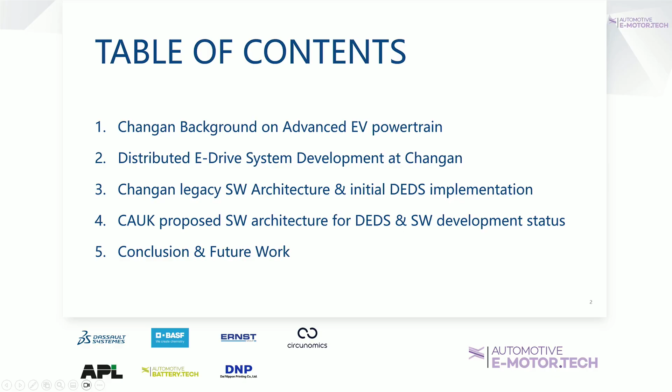I will introduce succinctly the background on advanced EV powertrain at Changan. Then I will move to the distributed e-drive system development within our company. We will see the legacy software architecture in terms of electrical architecture on the initial DEDS, which is distributed e-drive system implementation. We will move to the proposed software architecture that we push forward at CA UK for the DEDS electrical architecture on software also. And we will conclude and talk about further work.

So, background. Etienne already presented the company, so I won't go through that again. In November 24, the technical roadmap was outlined in the press for the company. It was announced that Changan will work on innovative new energy vehicle platform, internal development of advanced electric drive unit, EDU, and integrated control for powertrain and chassis development.

In the UK, we are currently leading the inverter control software method through Etienne and his team, and actively participating in the software development of the new EDU platform. The brand motto was defined as ultra agile, ultra intelligent, ultra safe. So they want to do everything. That's nice.

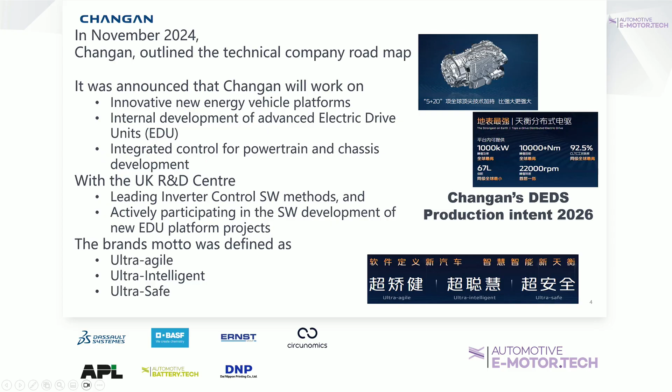And from that, we're going to talk about distributed e-drive system. To fulfill our mission for enhanced agility and safety, we are developing distributed e-drive system. Basically, instead of having an electric machine through a differential, on the same axle we will now have two e-machines which are not connected to each other. Each e-machine can provide torque to the wheel individually.

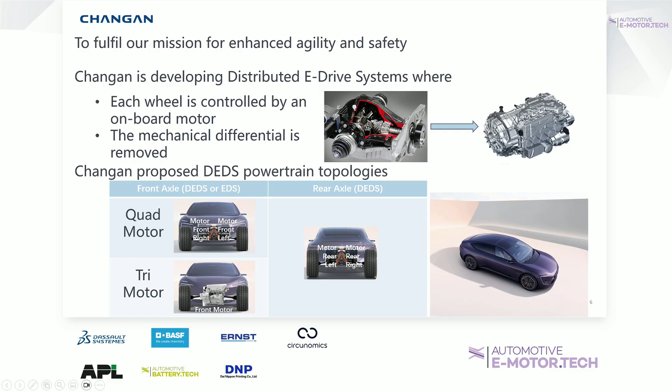And we've got two topologies that we will push forward. One with quad motor, so one DEDS on the front, one DEDS on the rear, and a tri-motor configuration with the rear axle still being distributed e-drive. On the front axle will be a single machine through differential.

So we are not the first on the market with this type of technology. We consider different strategies for control, taking advantage of the distributed e-drive system. So we consider traction control, stability control, pull drift compensation, which is currently done by Ford using the power steering and by Mercedes using the brake system.

We can consider tank turn, which is a big thing in terms of marketable feature. If controlled, we can wind up the motor against the suspension when in park and just try to control the level of the car. So on a camber road, we can have the car sit straight and get into the car.

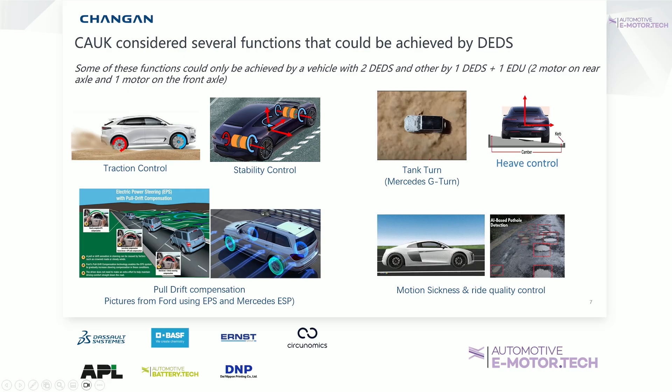Motion sickness and ride quality control can be controlled by adjusting the pitch and also eventually the roll. So for this presentation, we're going to focus on a few aspects of this control strategy.

So stability and wheel speed control. We want to enhance the agility in cornering on all types of terrain. We want to affect the straight line stability using pull drift compensation. So if there is a change of camber, we can keep the car on a straight line.

If you've got lateral wind also, provided the driver doesn't interact with the steering wheel, we can try to keep the car on a straight line. We can enhance the launch by controlling acceleration and also work on the wheel slip or wheel lock control.

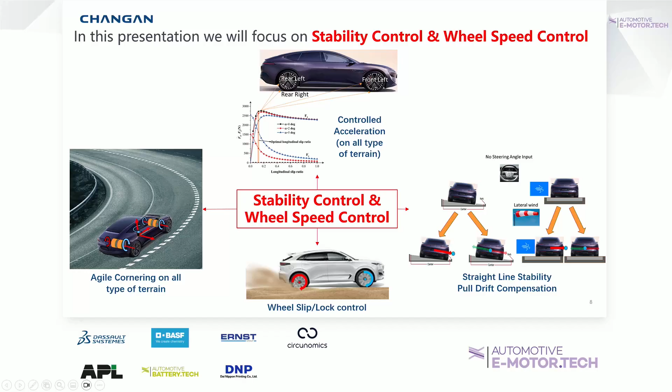So from this high-level view, when we dive into the type of feature, we've got the feature we need for the powertrain, then we need to develop function to support this feature. When we look at pull drift compensation on agile cornering, we think about left-right torque ratio. And when we look at control acceleration and also agile cornering, we think about front-rear torque ratio.

So we will have control strategy to provide us a target ratio for left-right torque distribution on front-rear. And we will provide from that individual wheel torque request on each of the wheels on the four corners of the vehicle. For wheel speed control, it's a bit more dynamic. We are considering using for each motor on each wheel a lash crossing function, a wheel slip control embedded within the inverter, torque intervention, and anti-jerk.

We also need to develop some observers to support this function. So we need to have a wheel slip calculation, vehicle ground speed estimation. When you've got four wheels spinning, you still need to estimate your vehicle speed. Vehicle state estimation, understeer, oversteer, road mu estimation, mass, and road slope estimation.

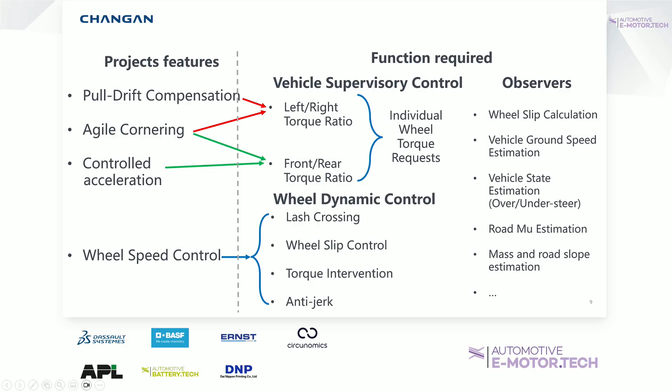Okay, let's go back on Changan legacy software architecture and the initial DEDS implementation. We are a brand coming from conventional vehicle, so at the time we were really EMS-centric. You've got all the ECUs of the car that communicated through the EMS. So we've got accelerator pedal input directly hardwired to the EMS, the ESP, power steering, body control module, all inputting into the EMS, EMS closely communicating with the transmission to provide drive torque, longitudinal torque.

We moved later to HEV, PHEV, and for this, because we add a source of energy, which is the battery and the e-machine, we created a new controller in the middle. Now the EMS is a bit more of a slave of the VCU or PDCU. We are now doing the vehicle supervisory controller in this central unit.

Moving to EV, we still kept the same type of implementation for cross-platform compatibility, but now we don't have any transmission or EMS, so it's kind of simplified. But we still have the VCU at the heart of the torque management.

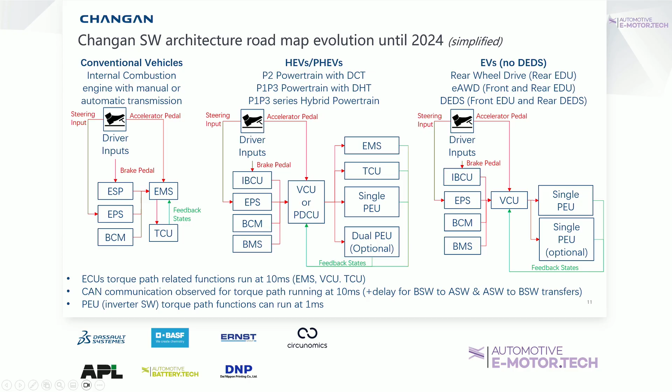So what are the drawbacks of this type of architecture? I would say latency. In terms of communication, usually the torque path, we send messages, even if you've got FD-CAN, we usually send a message every 10 milliseconds from the different controllers, brake, power steering, body control module, BMS, to the VCU.

And we don't really use our controller in a clever way. We use the BSW, basic software, on one core, and the application software on a different core. So it means that when we get the signal, it has to go through one run of clock through the BSW, 10 milliseconds, we go into the ASW, which takes 10 milliseconds, we go back out 10 milliseconds, and back out on the CAN, 10 milliseconds.

Then we go onto the different actuators, EMS, TCU, PEU, optional PEU for E4-wheel drive, and the feedback from this, with the actual torque derived by each actuator, will come back at 10 milliseconds, and we'll have to go through this loop of BSW, SW again. So the latency from requesting a torque to getting the feedback of what this torque does is around 80 milliseconds or over.

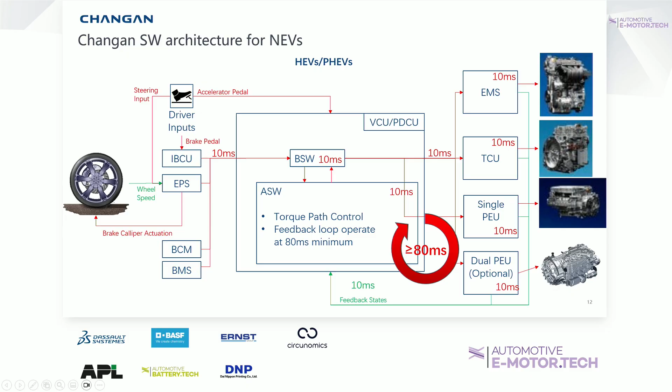When we look at the DEDS, we obviously at HQ, they just kept this implementation and kept this high latency inside the control strategy. So they're starting to update the torque path to provide individual wheel torque out of the VCU, and also they took over some of the wheel slip control, and then they will send that from the VCU to the inverters.

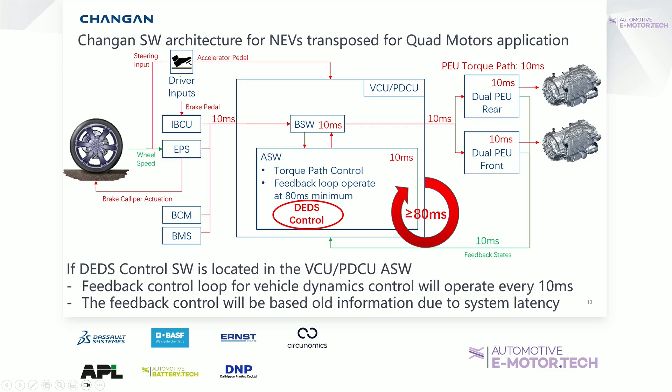A more comprehensive picture of our software function deployment on the different controllers. So we've got ESP. ESP will provide the front left, right, rear left, rear right speed, the torque reduction, the torque increase to go against wheel slip, wheel lock.

We will get the torque demand from the driver inside the VCU, and we will monitor all the states also coming usually from the IBCU that has the IMU sensor, so lateral, longitudinal acceleration, yaw angle. And we will define inside the VCU individual torque targets for the inverter. So the inverters, in this case, are fairly light in terms of torque path function.

We have wheel slip control that responds to a maximum and minimum wheel speed calculated by the VCU. We've got anti-jerk, which is kind of a feature that already existed. But most of the supervisory control is located in the VCU. We still have this loop of 80 milliseconds of latency.

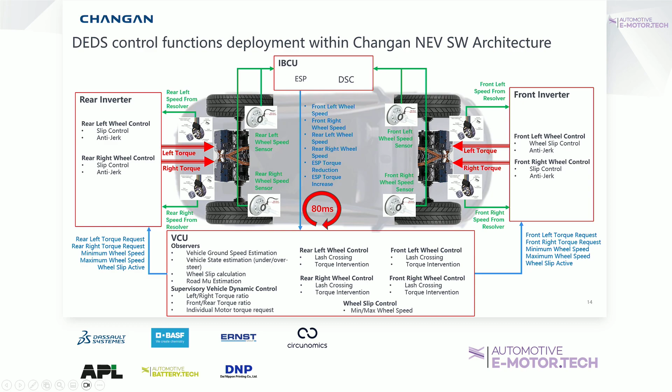So that was the first implementation of DEDS at Changan from our HQ colleagues. So the goal of the system is to focus on high dynamic and fast response of the drivetrain. Currently it's developed with the aim to reduce the ESP, DSC intervention, allowing enhanced and smoother chassis control than the base brake system response, and obviously a faster response of the torque at the wheel. The Changan legacy software architecture for an EV does not fully allow us to fulfill these goals due to the latency of system response.

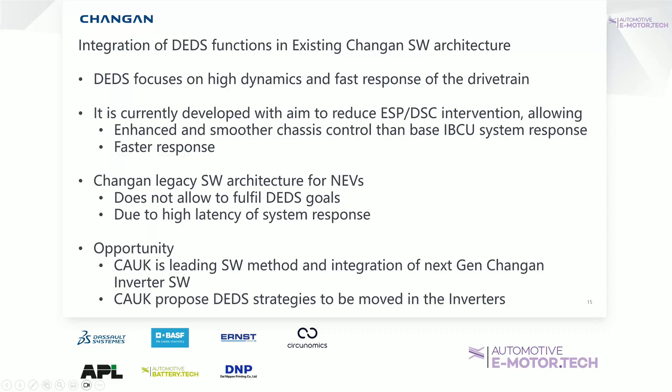So at CAUK, provided that we are now in charge of developing the software method and the integration of the next Changan inverter software, as Etienne presented earlier, we have identified some ways to improve the situation and propose new deployment of the function and the strategy to be moved into the inverter.

Okay, so let's look at that. In terms of quantification of why it will be more interesting to go into the inverter rather than the VCU, I can talk about experience.

When I was working at Great Wall, we had the BMW Mini project, and we had drive shaft popping up on the washboard test. At full load, every time you go onto a washboard, due to the high torque of the e-machine, you got a really high acceleration after each washboard, and then at a certain speed, a frequency would come into place and the drive shaft would pop up from the differential.

So we had to introduce some torque surge damping function. We tried to do it in the VCU, but this did not work. So then we had to put a requirement on our inverter supplier to introduce this function at the inverter level. Provided they got lower latencies, they managed to resolve this issue.

So this kind of hints that it's better to go into the inverter for this type of functionality. We want fast powertrain ESP torque intervention response too. If we look at the conventional setup with the current software architecture, the ESP sends the torque increase or reduction request to the VCU, and then we arbitrate the torque demand, go back out on the PEU, and we get torque reduction or torque increase to counteract wheel slip or wheel lock. This takes around 62 milliseconds.

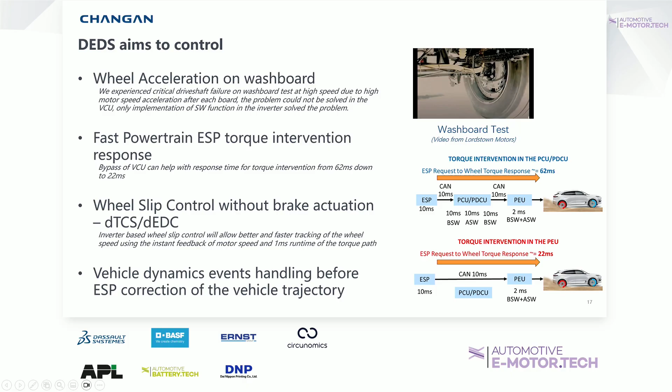Okay, I've got a slide there to talk about wheel slip control. Most of this data is marketing data from BYD's iTAC system. They show that it's better to rely, in this type of powertrain, on the e-machine resolver speed rather than the wheel speed sensor. We can get an accuracy 300 times higher than the wheel speed sensor accuracy.

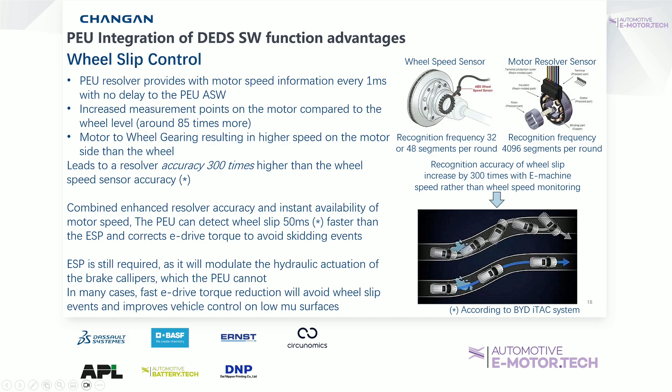Provided we also short-loop the communication between the brake system and the inverter, we can detect wheel slip as early as 50 milliseconds faster than the ESP can detect within the current implementation, or counteract the current skidding event. So this was one motive to push the wheel slip control inside the inverter.

If we look now at our new proposed software architecture at Changan, currently we still keep the driver demand in the VCU. The VCU does have other functionality related to power up, power down of the vehicle, and management of the interaction with the BMS. We may move that later on inside the inverter, but in this case we keep the driver demand, so we get wheel torque demand coming onto an inverter.

Let's say the rear inverter will be our lead inverter, where we have all the observer and vehicle supervisory dynamic control functions to define the individual motor torque request. We get torque target from the lead inverter sent to the front inverter through FDCAN using a 1 millisecond frame sample rate.

For each wheel, we will have the functions for lash crossing, wheel slip control, torque intervention, and anti-jerk. This can reduce the feedback loop from 80 milliseconds to 2 milliseconds. Obviously, we still need time to detect issues with the powertrain, but it will still shorten our reaction time.

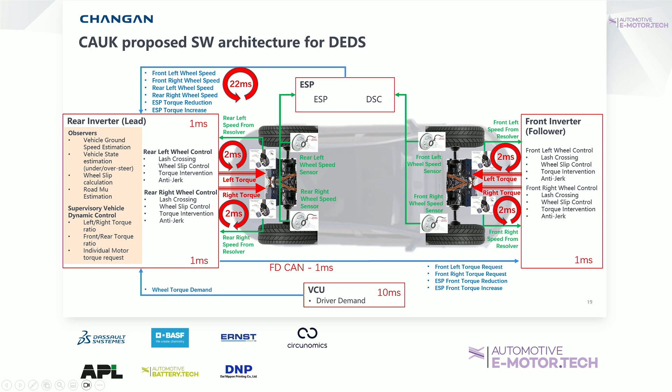So if we look at what we've done so far in terms of software development, we have worked on wheel slip control. By detecting faster that the wheel is slipping, we can reduce the torque to the maximum torque available on the surface, and then we get a better launch.

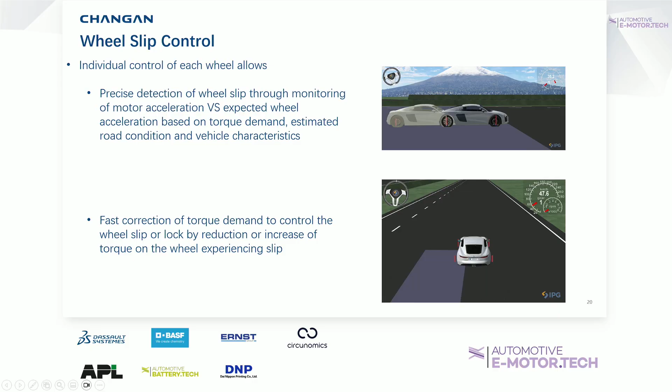If we look at wheel slip control for slip, we also have a faster response. In this case, the car that goes off the track doesn't have any ESP intervention. However, we can see that without any ESP intervention, in our case, we can keep the car in a straight line. We still have to have some steering wheel correction, but it's reasonable.

We worked on pull drift compensation, which comes from the observation that without steering the steering wheel, just changing the yaw target will have a knock-on effect on the distribution of torque left to right, right to left. You can also steer the car with this type of function.

This is currently used in one of the BYD vehicles, the big SUV, which does steering redundancy using this concept of control of the steering through motor torque request.

Provided we can do this, if we look at the lateral acceleration and yaw angle of the vehicle on a straight line with no input from the driver, hopefully meaning the driver wants to go straight, we can counteract any change of camber that would push the car into a ditch if the driver wasn't attentive. The same applies with lateral wind - we can just control the vehicle in a straight line.

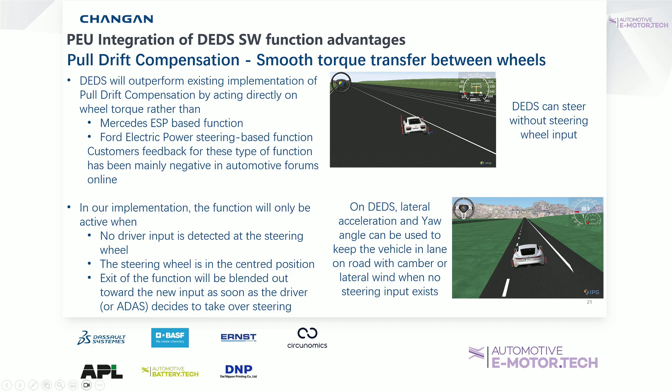Obviously, when the driver takes over control of the steering wheel, we would blend out the function and hand over to the different function from the DEDS control strategy, which is vehicle agile steering in this case.

In this case, we can show this is a low mu surface - sorry, it's IPG, it's not Simulia, that's what we use currently. We control the torque for each motor individually based on different conditions.

We monitor the yaw, lateral acceleration, longitudinal acceleration, and the status of whether we are oversteering or understeering. If we start to oversteer, we don't want to carry on controlling the car with too much delta of torque between left and right - we want to reduce it to allow the driver to counter-steer and take over control through acceleration. But it's quite an effective way.

If we look at two different use cases, one without our controller active and one with our controller active, we get better tracking of our trajectory on this low mu surface. So it does enable a safer response from the powertrain.

Obviously, if you use that to go faster, you will crash at a faster speed.

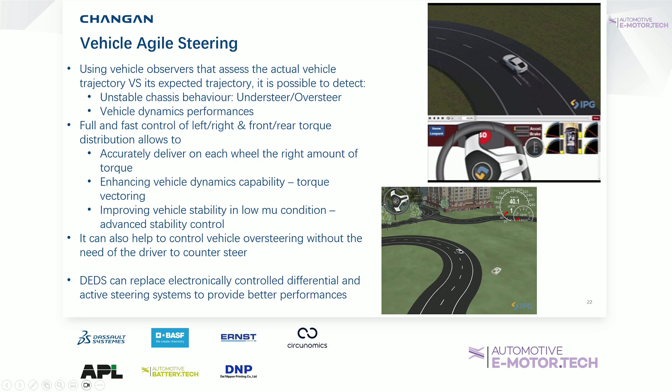What do we do at CA UK to validate this functionality? Currently, as you saw, we are using IPG CarMaker in co-simulation with our control software in MATLAB Simulink. We have our different modules, and we also simulate CAN latency between the different ECUs. Then we communicate with CarMaker, where the track and powertrain are defined. We define our driver model and run the test with or without our control strategy enabled.

This is all good, but it doesn't really give us feedback on how we're performing in terms of vehicle dynamics and what the driver feel will be. So we went a step further and implemented a fairly simple driver-in-the-loop test rig. We took a car seat from one of our vehicles, a Fanatec steering wheel with pedals on a steering wheel rack with a large curved screen, and we can drive the car in different conditions with the driver in the loop, so we can assess the performance of our calibration.

That's the current status. We also have an AVL 5-axis powertrain test bench - we don't need 5-axis, we need 4-axis with 2 DEDS. We are currently waiting to receive the DEDS unit from China, and we will mount this unit on the test bench and do some dynamic tests to check the performance of the powertrain.

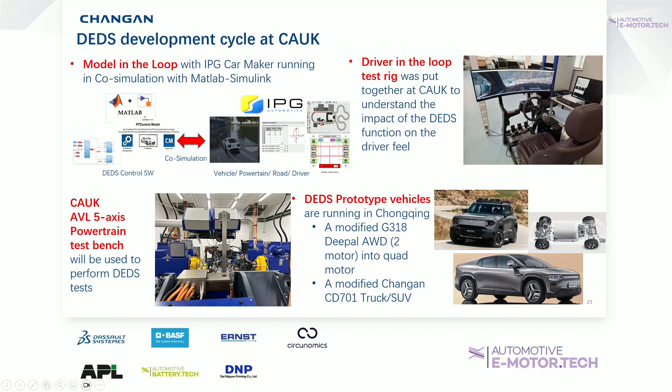We also have vehicles running in Chongqing, not in the UK currently. We are running 2 modified vehicles, the Deepal G318 and the Changan CD701, which is like a Cybertruck type of car. These cars have got, I think, 2 DEDS, one with 1 DEDS plus 1 single EDU. We will receive some prototype vehicles in the UK next year, so then we can move from simulation and test bench testing to the real vehicle and validate our concept on the track.

In terms of conclusion, currently Changan is committed to providing a vehicle with an exceptional level of drivability and safety - that's always good. At CA UK, we identified the required software architecture changes for our next generation of powertrain to improve the response time of our controller and the torque delivery and accuracy at the wheel.

Our future work: we want to demonstrate our DEDS technology on our prototype vehicle, which will be more credible than just simulation. We will continue to develop advanced control strategies for further enhanced powertrain performance. We have also merged with the chassis control team, and we will develop the next electric power steering control strategy.

And this will come also with some interaction with the active all-wheel steering system, the active suspension system, and the braking system. We are going to work on this project, so it will also allow us to get more cross interaction between the different domains and improve the vehicle drivability further.

Okay, thank you. I don't have a slide with questions, but that's your time to ask questions. And thank you very much.

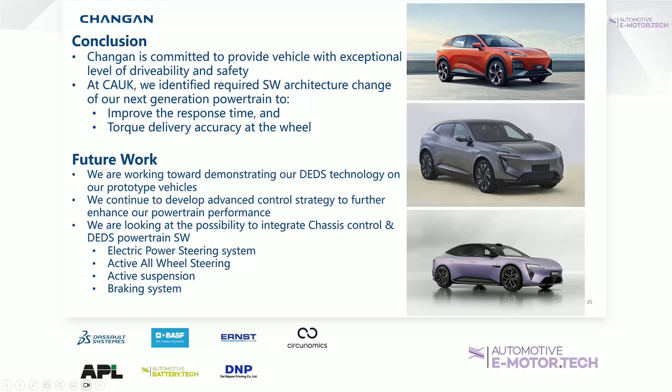So we've got the control, as the Chinese OEMs move forward in terms of e-architecture, they tend to want to do everything on their own in terms of software development and deployment of the function in the different ECUs. Thank you for the presentation.